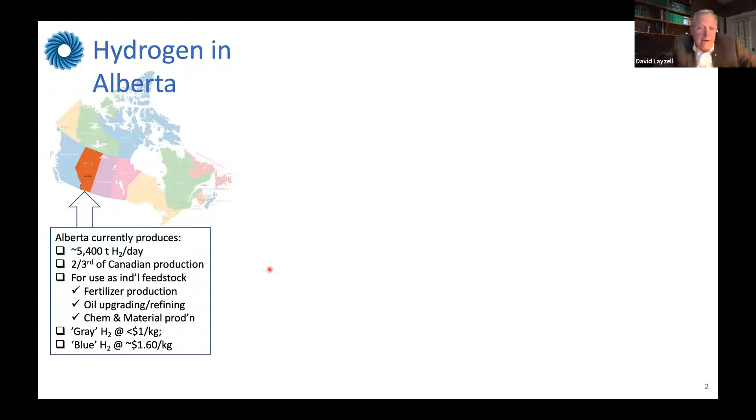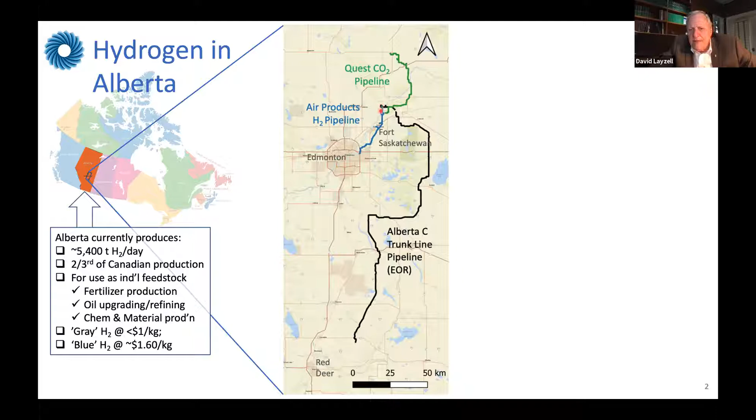Now I want to focus on one area here that Mark mentioned, around the capital of Alberta, which is Edmonton. The city of Edmonton, just to the northeast of it, is a major hydrogen corridor. There's a 50-kilometer long hydrogen pipeline and two carbon dioxide pipelines that have been built in the last 10 years. The hydrogen is produced, and the CO2 is captured, from 3 plants. We'll zoom in on this a little more closely. In this region itself, there's over 2,000 tons of hydrogen being produced per day.

It's being used there as well, of course, as an industrial feedstock. These facilities up here are actually producing blue hydrogen - there's Northwest Redwater, an upgrader, the Scotford upgrader, and a fertilizer plant. The CO2 is being put into either the enhanced oil recovery line or the Quest CO2 pipeline.

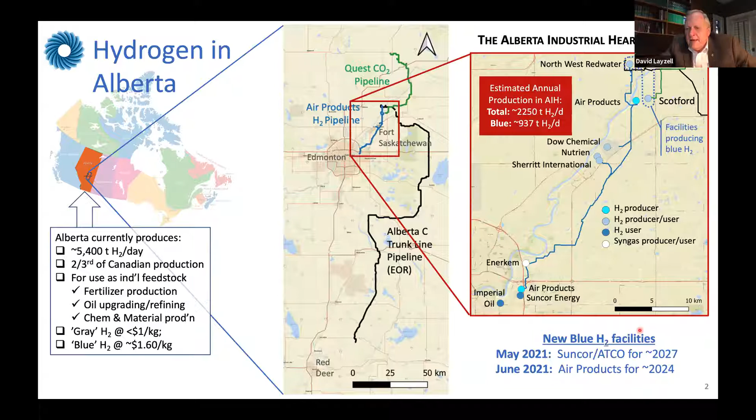In the last 4 or 5, 6 months, there have been a number of announcements of new blue hydrogen facilities being built with autothermal reforming, capturing about 95% of the CO2. One is by Suncor and ATCO, to be built down in this region. There's another one by Air Products, also to be built down in this region. These are going to add perhaps another 2,000 tons of hydrogen a day of production.

Now, of course, the challenge when we look at moving into a fuel hydrogen system is significant, because we have to create a whole new value chain. One of the things we've been noticing in our analysis is that the real challenge is getting to scale to make it economically viable, so we don't have to rely ongoing on public support.

To be economically viable and deliver hydrogen at a reasonable price, the hydrogen fueling station must handle at least 2 to 10 tons of hydrogen per day. So we need about 40 to 200 heavy duty trucks or 100 to 500 buses for every station we deploy. That's quite a challenge, as you can imagine.

While hydrogen fuel cell electric trucks are clearly the vehicle of choice because of their efficiencies and low maintenance costs, hydrogen dual fuel vehicles in our analysis can help us get to scale quickly with minimum risk to the carriers. Not only are these vehicles very hard to find today in the heavy vehicle sector, but there's a real concern that if they run out of fuel, they basically don't go anywhere. Whereas hydrogen-diesel dual fuel vehicles can help create this hydrogen economy - but if they can't get access to fuel, these vehicles just become diesel vehicles again. That's part of our analysis of how we're trying to build a hydrogen economy here.

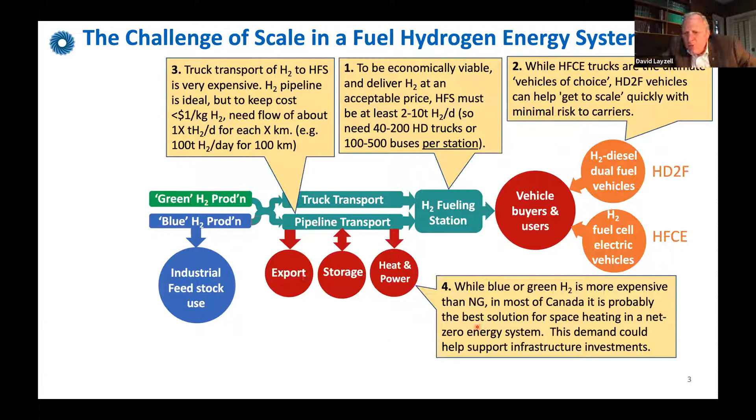Blue and green hydrogen is more expensive than natural gas in most of Canada. It is our analysis, and others have suggested, that hydrogen is probably the best solution for space heating in a net zero energy future. This demand could really help support the infrastructure investments we're building into our strategy.

One other point here is that blue hydrogen production emissions of less than 1 kilogram of CO2 per kilogram of hydrogen is essential, and that would give us overall lifecycle emissions of about 3. The upstream methane emissions are coming down dramatically, and with new laws in the next few years, we're hoping to drop this considerably. We can easily meet that target with some new technologies.

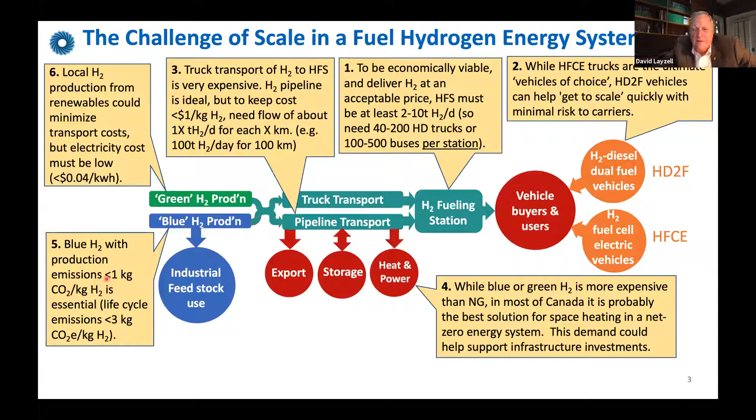Local hydrogen production from renewables could minimize transportation costs, but the real challenge is we've got to keep electricity costs low to get hydrogen to the marketplace. So our overall strategy is to piggyback on low-cost industrial blue hydrogen production, pipeline hydrogen to new fuel markets, rapidly grow demand in those markets, and also attract hydrogen-using industries. While there may be a role for liquid hydrogen in distribution, we see this as one for building new stations and new demands, and trying to expand the infrastructure support.

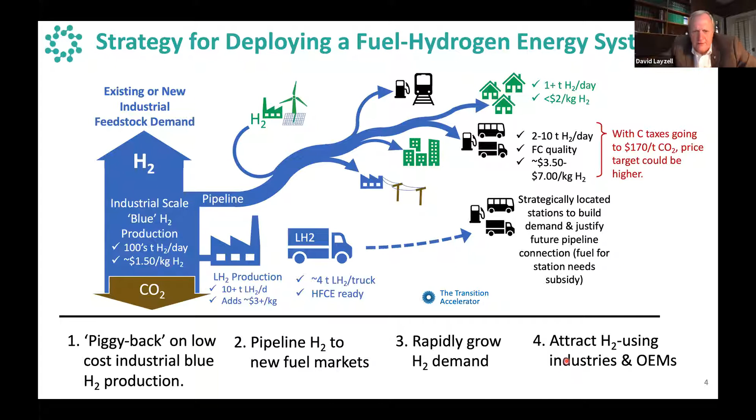Certainly a role, but hopefully not in the central. I'm just going to identify some of the projects we have going or working on now.

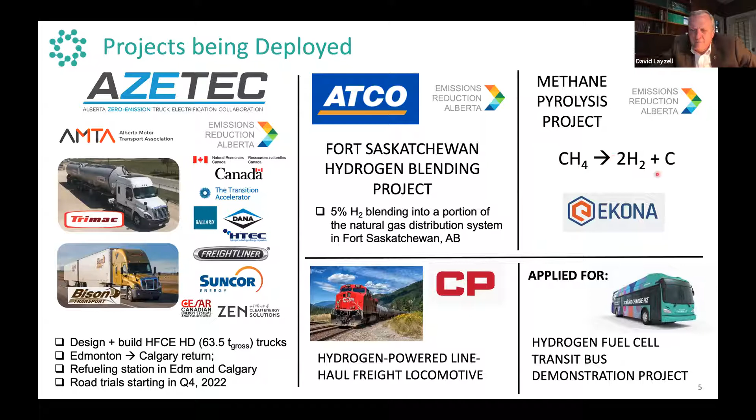There's an ATCO project in Fort Saskatchewan to put hydrogen into natural gas pipelines at about 5% blend and eventually increasing. There's a CP Rail project building hydrogen fuel cell trains. We're working on applications for hydrogen fuel cell transit bus projects, and there's projects for new ways of making hydrogen through natural gas.

We're also working on a project with hydrogen-diesel dual fuel technologies for various types of trucks and even heavy haulers that are off-grid, off-road. We're working with existing truck companies selling hydrogen trucks to give users hands-on experience, so hopefully successful companies will buy these trucks and support the fueling infrastructure. Thank you very much for the opportunity to talk today.

Thanks for the quick overview, Dave, I'm sure there'll be lots of questions about that. I'm particularly interested in how it's working. You can see that projects are now being attracted to the Edmonton area, which, to the minds of municipalities and politicians, means investment flowing in, and meaningful GHG reductions being produced. So I think it's showing the impact that hubs can have.

But Edmonton is certainly not the only location in Canada working to develop hubs. One of the early areas of hydrogen activity in Canada, with several decades of experience, is Quebec, particularly the Bécancour area, where there's an existing major liquid hydrogen plant, recently expanded, that's been supplying hydrogen into the North American market for decades.

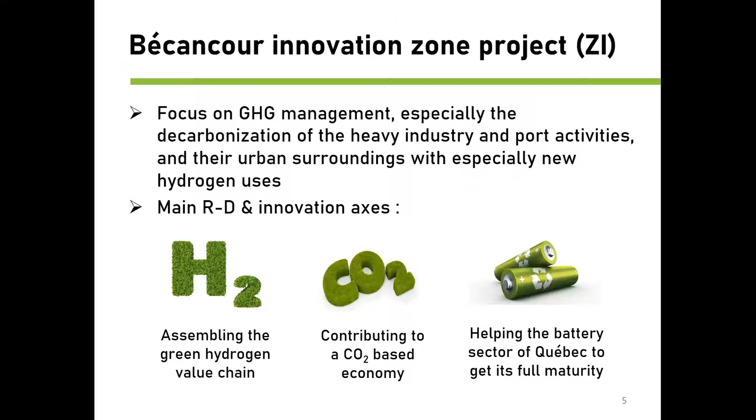The zone project is supported by local stakeholders who help us facilitate partnership development, attract new business in the zone, and achieve social acceptability.

We have an interesting chain of innovation here with universities and research centers, as well as many technology transfer centers. Universities and technology transfer centers contribute not only to knowledge development and transfer, but also to training, especially regarding hydrogen technology integration.

We have many other partners, including Cummins, Energy, Hydro-Québec, and we have more and more international relations. We are beginning to attract some interesting companies.

To be more efficient and connect our new zone community, we plan to have an innovation center to welcome private labs and pilot test benches.

Coming back to our hydrogen vision, we want to build the Quebec green hydrogen value chain, especially the development of a value chain for the manufacture of electrolyzers, with the idea to become not only a green hydrogen hub, but also some kind of gigafactory.

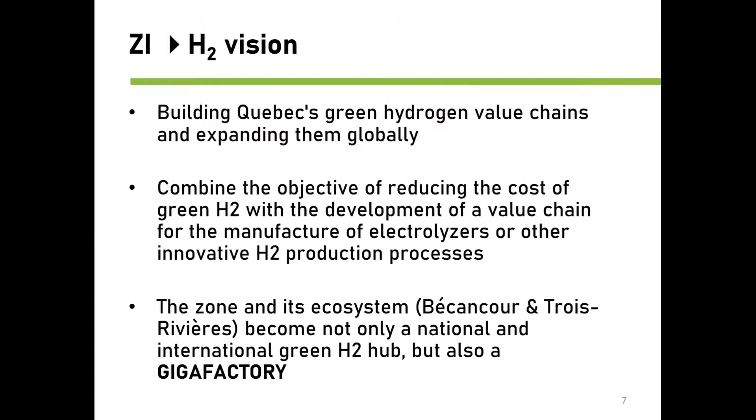For this, we have recruited Professor Bruno Pollet, who is the holder of our hydrogen vision. Professor Pollet is a worldwide renowned specialist in green hydrogen production. We have succeeded in attracting him to Canada, and he's now a University of Quebec Trois-Rivières researcher at the Hydrogen Research Institute.

I don't know if he's there. I know that he will come back for the question part, so we will let him have a little chat there.

Just to speak rapidly about this concept of the gigafactory: that's the place where we want to build electrolyzers and fuel cells, where we want to encourage local manufacturing companies to manufacture pieces for electrolyzers, pieces for fuel cells, and a lot of accessories around that. We want to have this chain of value related to the manufacture of electrolyzers.

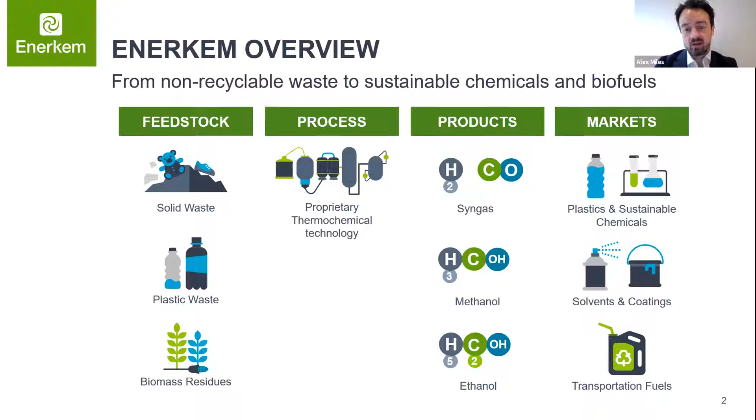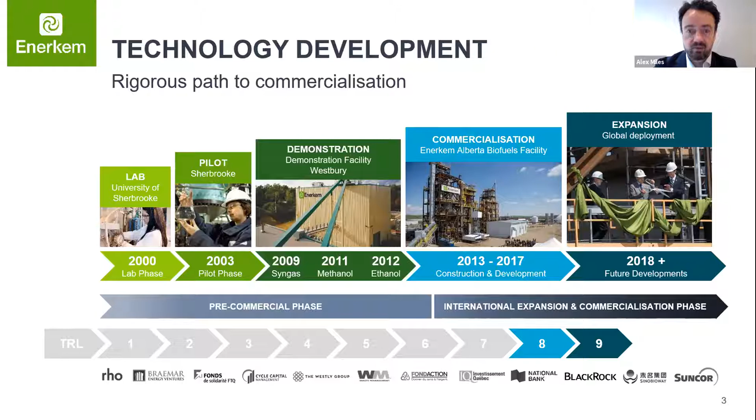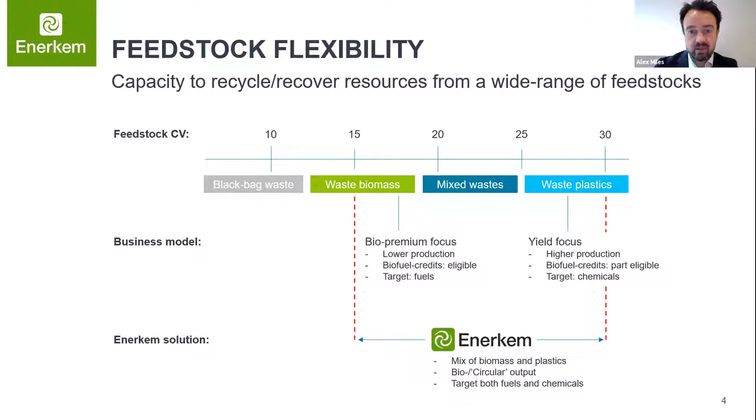Talk about waste: it's unrecycled waste, the reject fraction from existing recycling plants. We're not looking to compete with other recycling processes. Typically these wastes fall into two categories: either biomass, composed mainly of biogenic carbon, or plastics from fossil carbon. In the middle is a mixed waste stream, which can be hard to separate and typically contains low-grade plastics, food waste, and residual waste streams that cannot be economically separated. Our range is between those two boundaries, so we can handle both, very much focused on the rejects rather than competing with existing recycling processes.

In terms of our latest announcement, referenced by Mark at the beginning, we recently closed, at the beginning of this year, the Varennes carbon recycling project, which comprises an ENERKEM biorefinery producing alcohols and fuels from various waste streams, together with a large-scale 87 megawatt electrolyzer being developed by Hydro-Quebec. It's a unique project combining the two projects together - the start, perhaps, of a hub or cluster. The reason we do this is that it enables us to maximize the production and environmental performance of our technology.

How does it do that? A quick block flow diagram to give you a rough idea: we receive the feedstock into our facility, which we then gasify to create a syngas. This is cleaned to a petrochemical grade syngas, suitable for methanol synthesis and other downstream chemical processes. Together with the electrolyzer, by taking both the oxygen and hydrogen generated by the electrolyzer, we can double the production. This means over 70% of the carbon in the waste is captured in the products we produce from our facility.

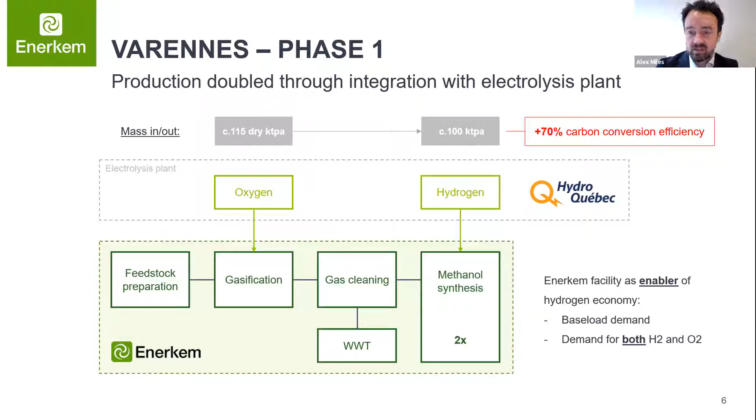In this way, this project is an enabler of the hydrogen economy. We are a large-scale customer with steady-state, continuous demand for hydrogen, and that demand facilitates the development of hydrogen production capacity - in this case, electrolysis in Quebec, delivered by Hydro-Quebec.

However, an alternative business model alluded to at the start is that we can also look to produce hydrogen via our platform. The syngas we produce is a mixture of carbon monoxide and hydrogen, and by shifting that carbon monoxide to hydrogen, we can focus our production on hydrogen itself, leaving CO2 for carbon capture and storage, to again maximize the environmental performance.

This is a newish model. The company today has been focused mainly on maximizing carbon conversion, but with increasing interest in hydrogen and incentives being offered now for hydrogen as either a fuel or a consumable in other processes, this is a business model we're now starting to develop more readily, particularly in locations where electrolysis is perhaps not a favored production pathway.

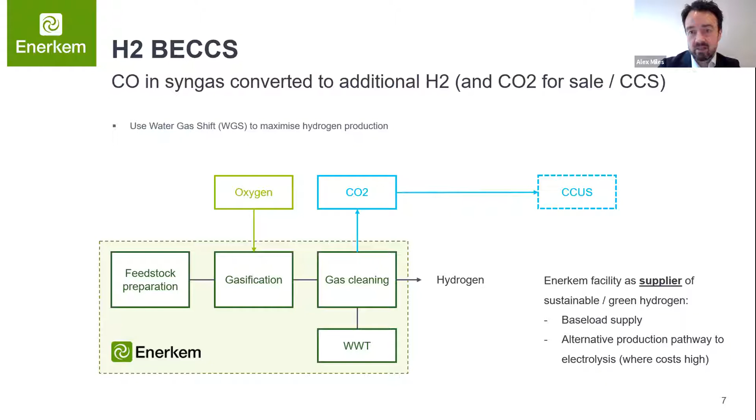Finally, on that last business model, a couple of challenges: producing hydrogen this way tends to be relatively expensive, so higher production costs. We saw earlier some of the infrastructure initiatives starting now, but we don't yet have mass take-up of hydrogen as a transportation fuel and the infrastructure to support that - that's a limiting factor. Finally, a strategy around carbon: our strategy to date has been focused on carbon conversion into product, and if we follow a hydrogen production pathway, we end up with CO2 as a byproduct.

So some questions there as to how we reuse and recapture that carbon in other forms, again, to make sure that we are recovering carbon and delivering on the low carbon economy.

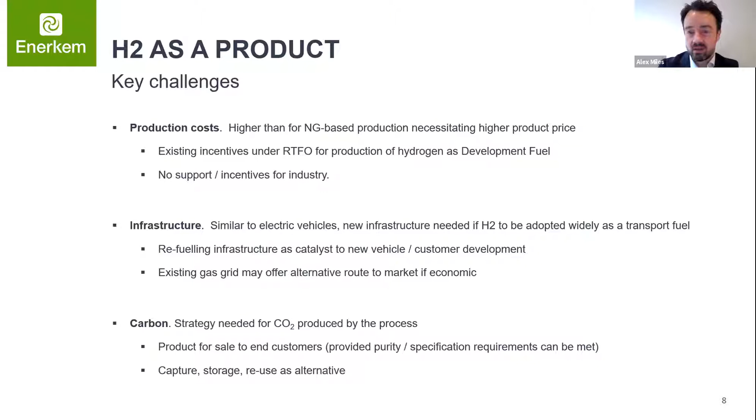Great, thank you very much. Thanks, Alex, much appreciate that. Again, interesting take on a hub, at least the nexus of a hub, a potential nexus of a hub which is an opportunity now to build around.

I'd ask at this point if Dave and Simon could rejoin me. There you are. Okay, so I want to get a little discussion going here, and we've got some questions that have already come in from the audience. But I'd like to start off by asking why your locations are the right places for hydrogen hubs. Is there something unique about what you are? You're obviously centered around industrial activity. Is that the only place to have a hydrogen hub? What are some of the considerations for somebody saying, gee, I'd like to be a hydrogen hub too? What considerations need to be taken into account? I'll start with Dave, since I know you've done some thought on this area.

That's a great question. I think in our analysis, there's a lot of places across Canada and around the world where hydrogen hubs would make sense. There are some companies that actually produce hydrogen as a byproduct, like they're making sodium hydroxide and they've got waste hydrogen. There's a significant opportunity there to build demand around those places. There are other places, in Quebec in certain pockets, and in Ontario near the nuclear power stations, that often have surplus electricity and a fantastic opportunity to make hydrogen and start creating a new value chain there.

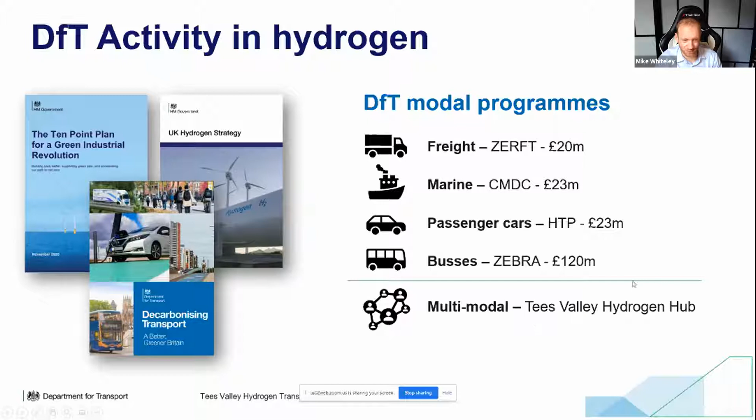In terms of the project and background behind it, for the previous spending review, 2021 to 22, we secured £3 million of funding to kickstart the competition and the project. The issue we were trying to address is that hydrogen is likely to be fundamental for decarbonising transport, as made clear in recent policy documents. The UK has strengths and expertise along the whole hydrogen value chain. Specifically for the Tees Valley area, 50% of the UK's hydrogen is currently produced there, because there's a lot of chemical industry in the area.

We need to understand the viability of hydrogen transport against other solutions, comparing them on a level playing field. So we're trying to apply economies of scale to this situation and seed supply and demand at the same time at the right scale, where we can see the viability of this and try to break through this market failure.

We've published a master plan that's online that everyone can see, and it shows what we're trying to achieve by 2050 for net zero targets. So feel free to have a look at that.

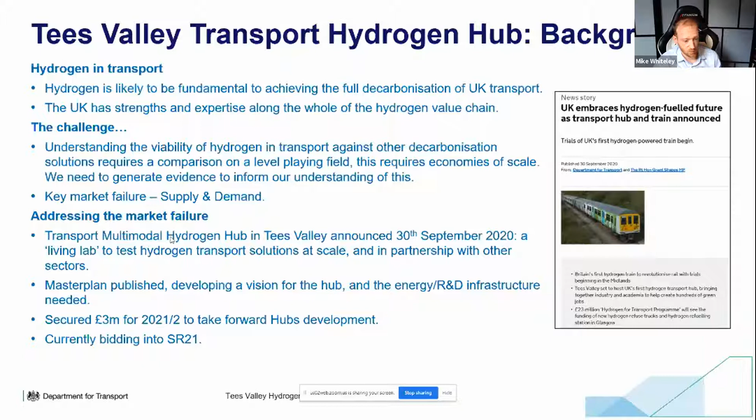In terms of what we've tried to achieve this year with the money we've been allocated, we ran an R&D innovation competition. Through our partners Innovate UK, we allocated £2.6 million towards research, development and demonstration projects. A selection of the winners includes projects looking at on-the-ground trials this year of 19-ton freight vehicles, 44-ton trucks, light commercial vans, food delivery vans, a fleet of passenger cars, a few buses, a marine vessel, and some forklifts. The whole point of this competition is to seed demand, get people working in the area, and start putting in some infrastructure.

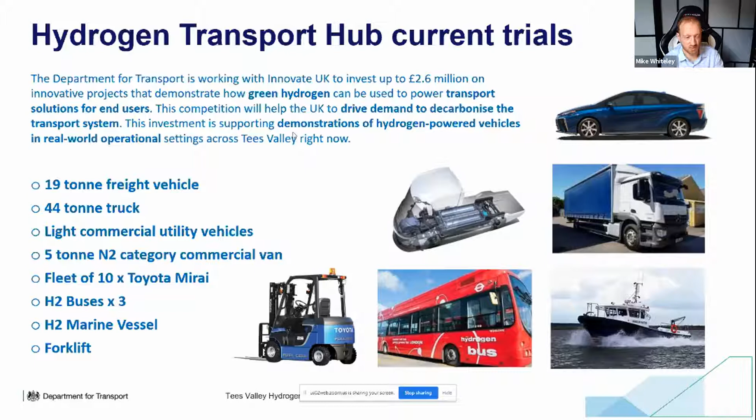So we've got some green infrastructure in place in the form of mobile refueling. This is to seed the project and support it in terms of hydrogen demand, but also build interest in developing that further for when we develop the project.

In terms of how we develop the project, it's still to be confirmed. We're obviously going through the spending review process now in the UK, and once we know the outcome of that settlement for the hub, we can look into how we develop it further. So we're using the learning from the trials we have in place now.

What kind of policy issues are we coming across? What is industry interested in developing further? What's the Tees Valley Combined Authority wanting to achieve? And how can we take that to the next level?

Initially, we're thinking of having a skills and development piece around a hub institute, upskilling the local incumbent workforce but also developing new high-value jobs. Retaining a research, development and demonstration function, and then increasing the scale of those trials and trying to get more demand in the area, but also complementing that with some green hydrogen production at scale.

So we're hopefully looking at multiple tens of megawatt scale green hydrogen production in the area, feeding testbed sites. This is where we have specific locations like a marine port or an airport, where we try to condense activity and make sure there are multiple modes of transport operating in that area, testing the viability of these ecosystems.

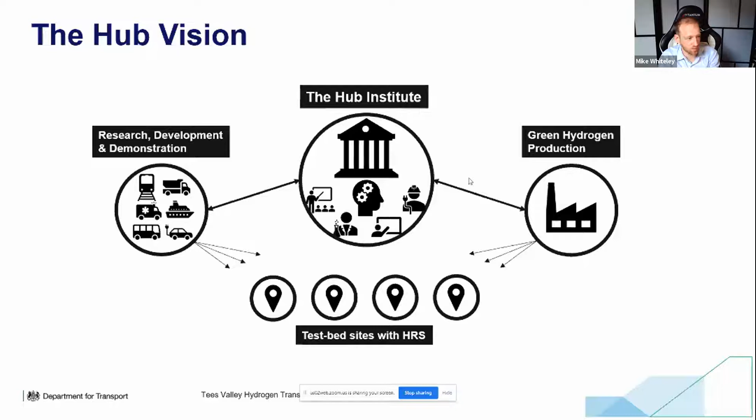So that's a very brief, in a nutshell, look at what we're trying to achieve with the Tees Valley Hub. I'm excited to hear what your thoughts are and welcome questions at the end.

Thank you very much, Mike. It's very interesting to see the action, clearly focused on centering applications around a center to get that economy of scale. I'll be interested to ask you some questions about governance, what's the role of government and so on. So look forward to that.

Next we have up Adele Lidderdale, and Adele is a hydrogen project officer for the Orkney Islands Council. We've heard a lot of news releases and articles coming out about the work going on in the Orkney Islands, and I'm really interested to hear how you're tackling it in maybe a more small and remote community. So thanks, over to you, Adele.

Thank you, Mark, for that introduction. My name's Adele, I'm the Climate Change Projects Officer, and I previously had the joy of being the project manager for a number of the high-profile hydrogen projects that we have here. Really, the initial driver for our projects was this: there was a real community need, so we'll discuss that here.

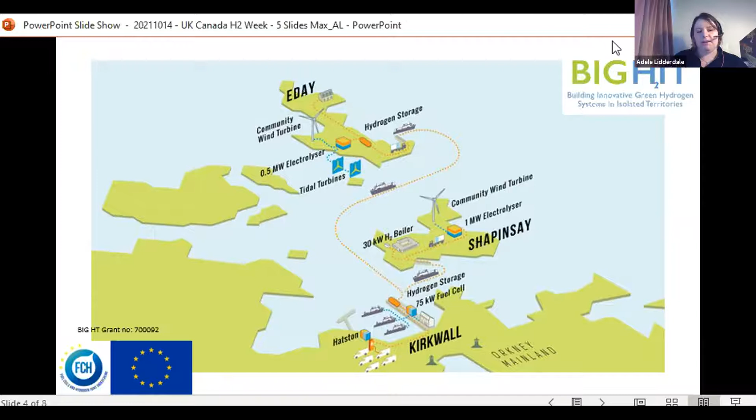So really our market conditions, our barriers, our drivers, they happened much earlier than what we're experiencing in the rest of the UK. Hopefully we'll touch on that in the panel discussion. But hydrogen quickly became like a grid balancing tool - the grid balancing potential became very clear early on.

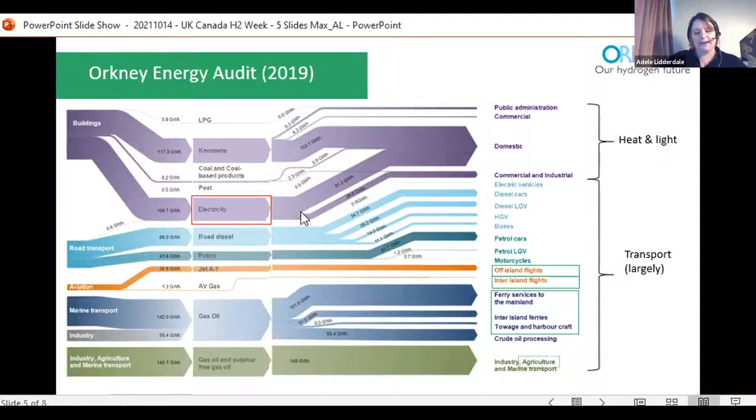And now we're starting to target transport, heavy ferries as our main user. So you can see there, we're still heavily reliant on fossil fuels. Despite generating so much green hydrogen, so much renewables, we're still heavily reliant on imported fossil fuel for other uses. So that gives us a scope and an idea of where we place ourselves moving forwards.

The HyFlyer project is important to note, we haven't really touched on this yet. We have a fuel that we use for some of our smaller passenger planes, but we're not going to be able to source that anymore. So there's this really near-term need to replace some of these fossil fuels.

As well as the project development, we've developed a suite of local policies - the hydrogen strategy, electric vehicle strategy, sustainable energy strategies - and it really helps bolster this need, keeps that pressure there to keep the project rolling, and helps with the global outreach and community outreach back as well. Most recently, last week, there was an announcement for the Flotta Green Hydrogen Hub, looking at repurposing oil and gas infrastructure, linking it in with offshore wind farm projects, and looking at export markets for green hydrogen throughout the rest of the UK and the global market.

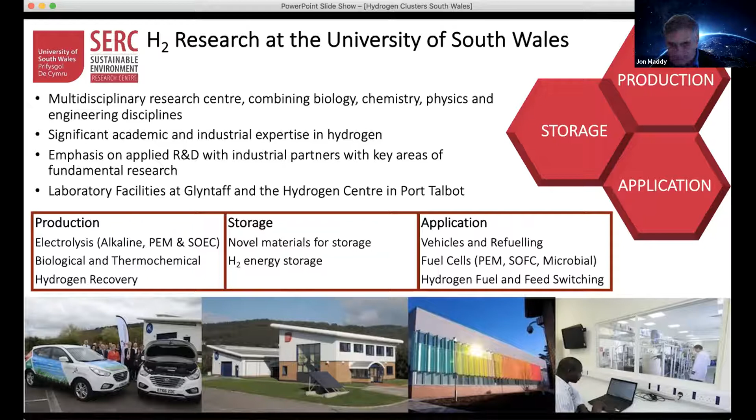So what have we done? We've pulled together this coalition of the willing, effectively over 40 of the largest energy users and emitters, as well as support activity from councils and government, and then academics like myself to assist in pulling together our plan to decarbonise and the role that hydrogen will play within that. We're engaged in two major projects at the moment: a cluster plan project and a deployment project, which I'll describe, and then also some other specific decarbonisation projects that look at different aspects, including hydrogen, as well as things like heat recovery and the like.

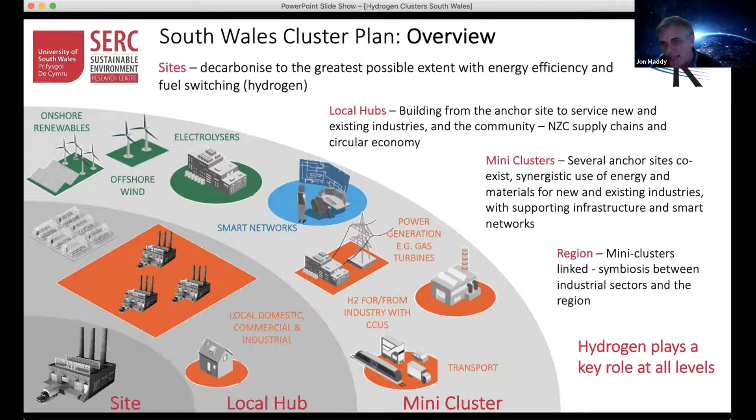And then within the broader industry sector, the ability to both offtake co-produced hydrogen. Some of those routes were mentioned earlier, but I'm looking particularly at hydrogen from steelmaking processes and the like, and then that linked with carbon capture and use and carbon capture and storage, and then clearly the spillover of that industrial hydrogen to transport as well. So the key is that hydrogen plays a key role at all levels.

And then just some specifics in terms of what's planned within our deployment project. The economy of South Wales is much more industrial than is generally the case in the UK.

The Port of Milford Haven currently imports around a third of the UK's natural gas requirements and has deep water ports with a petrochemical industry surrounding it. Coming eastwards to Port Talbot, there are major steelmaking facilities, also with a deep water port.

Around Barry there's a large conglomeration of chemical works. Cardiff has metals industries, and in Newport there's metals and chemicals as well, plus smaller ports dotted along the coast.

So in terms of the deployment project, effectively what we're looking at is major petrochem decarbonisation, particularly through adoption of green hydrogen.

In the power sector, we're looking at using hydrogen to displace natural gas in gas turbine power generation. In steelmaking, we're initially looking at hydrogen offtake from existing steelmaking, then making a transition path towards using hydrogen as the reductant for primary iron making and steel making.

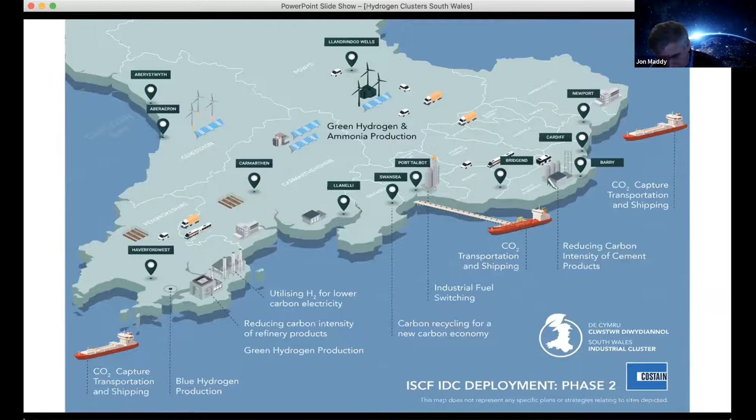Where are we currently? South Wales has a whole series of hydrogen production facilities dotted around, and it goes hand in glove with a lot of that industrial activity I've mentioned. From the west, we've got hydrogen production within the Valero Pembroke oil refinery.

We've got hydrogen production for nickel refining just north of Swansea, hydrogen production for export but also for steel finishing in Port Talbot, hydrogen for the chemical industry in and around Barry, and further east, hydrogen for both steel finishing and chemical production.

We've also got - and my own facility has long looked at electrolytic hydrogen production, but also biological hydrogen production. Our colleagues at Swansea University have electrolytic hydrogen production in a project they're working on with Hanson Cement. So the sum of this is there's a lot of existing capacity and expertise across various sectors in the hydrogen field in the area.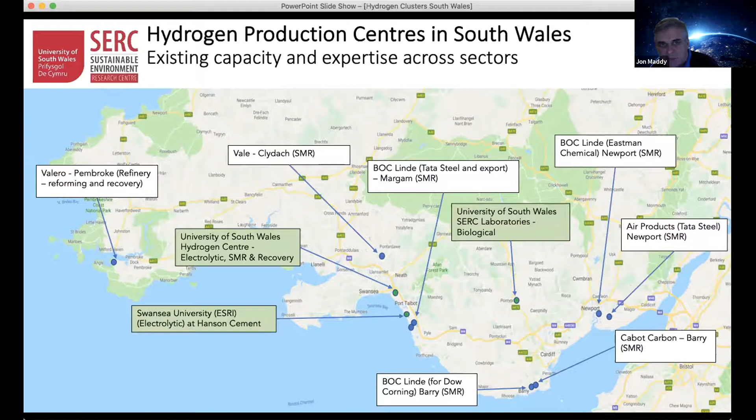That'll be developed over the next few years, but I think it's quite exciting to show that these projects are coming about and starting to happen - that's hot off the press.

So that's it from me, just a flavour of activity in South Wales, very heavy industrial flavour to that, but you can see that it touches on and is very similar to a lot of the things that previous speakers have said, both in the UK and in different parts of Canada as well.

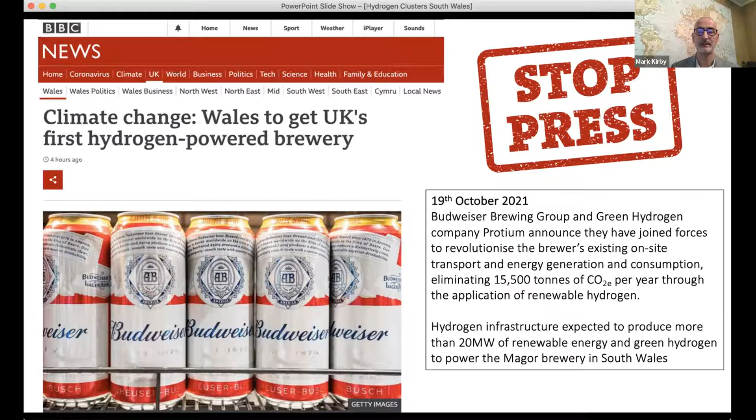Thanks very much, Jon. That's certainly an impressive amount of projects being considered in South Wales, and a massive investment. That shows the economic opportunity. I'll point out to my member companies that they're going to need a lot of hydrogen technology, carbon capture management technology, and fuel cell applications. So there's a real opportunity for collaboration between our countries in terms of how do we develop those international supply chains, how do we take advantage of that economic opportunity, and promote trade between the countries in that area. So I hope some of my members will be reaching out to yourself and to others to make those connections.

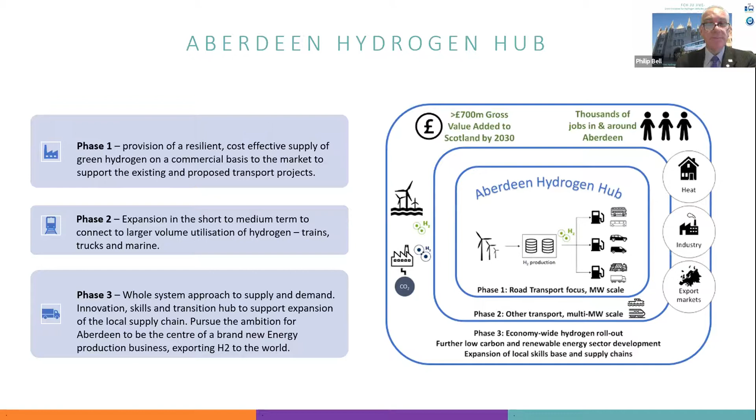Thanks very much, and that was a whistle-stop tour.

Thank you very much, Philip. Really appreciate the update on what's going on in Aberdeen, and again, citing lots of opportunities. I'd like everybody to join now if they would, and I would like to pose some questions here. We have very limited time left, but I'm really interested. I mean, I'm going to take as a given now everybody's pointed out the fact that we've got hydrogen and it can play a huge role in decarbonizing our economy, that we need to roll it out. We need to get it going.

I would take it as a given now from what I'm hearing that clustering into a hub has benefits. It allows you to get that scale and to share your resources. Again, a given. What I am not clear on, and I also will take as a given that every location is going to have differences in hydrogen supply, differences in applications, differences in opportunities. What I ask now is, what do you do to pull that all together? Particularly talking about governance. You know, obviously these are plans, they're fairly major plans, there's money being deployed. Is there a governance structure in place in your locations? Is it just discussions that bring together private sectors? How are these organized and how are they managed? And because I think it's really important as we start thinking about getting hubs in other locations is, you know, fundamentally, what do you need to do to get things going? What do you need to do in terms of, we talked about engagement, but then how do you govern it? How do you get things actually moving forward?